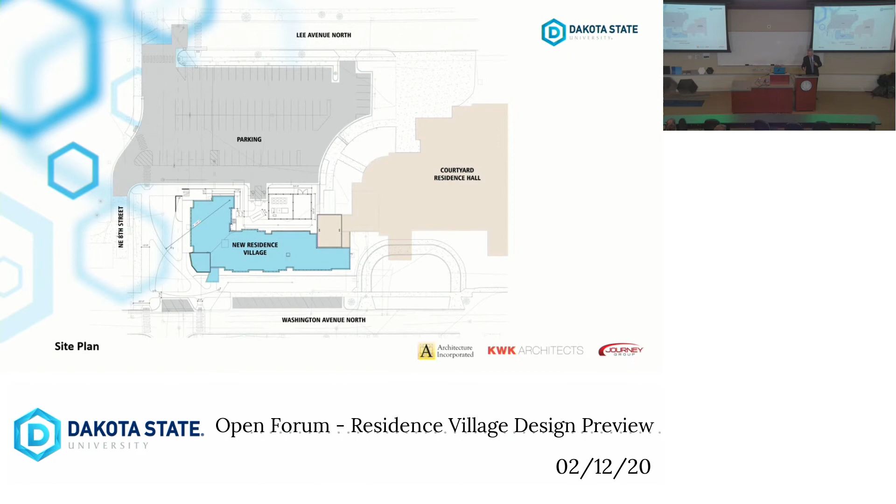So, okay, these are some of the exterior renderings. Did I jump one? Yes, one second, sorry. Okay, so this is a rendering from the back of the building. You can see the connection to 8th Street will be here.

So we're really trying to make safety extremely important. We made a clear effort to differentiate between traffic for the parking, traffic for the service of the student union, and pedestrian traffic for the students, making sure these are two separate things that don't cross each other. As you can see, all the parking for the courtyard is largely respected there. You have the four-story buildings, a combination of brick and precast concrete—we'll talk about that later—trying to link with the elements and colors that are part of the campus.

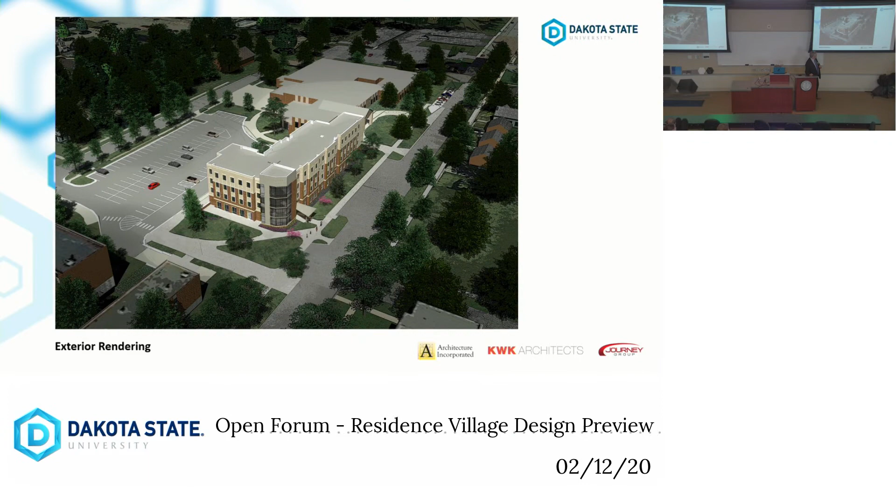So there's one more. This is a bird's-eye view, and that's the main entrance right here. You'll see we really are expressing those spaces that are part of the community building for students, and then we have the residential units that are a little more residential in scale, even though they are fairly large once you are into the bedroom itself.

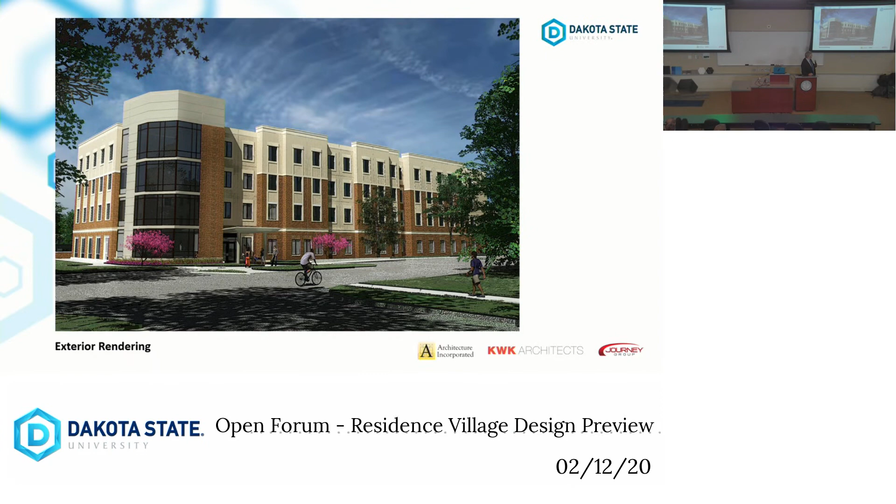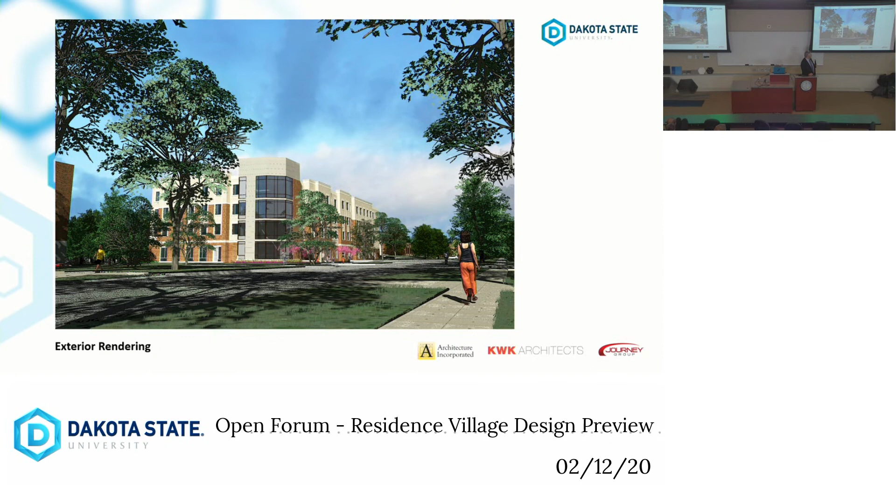Again, another just a little farther south. They're talking about the floor plan and the strategy used for that. I'm going to leave Terry to take it, hopefully she'll be much more versatile with this.

So this is the first floor plan. It looks a little different than the floors above, obviously, because this is where you come into the facility. North is this way. This is the main entrance, which is what Javi had pointed out, adjacent to all the glass, and that's why you see the lounge here, because that is where all of the common and community spaces are.

He briefly mentioned the kitchen is here. This is a community kitchen that can be used by all the residents, regardless of which floor you're on, but there's a kitchen on the first and third floor, and a lounge on all floors.

Here you can see some different color coding, and that's indicating different unit types so you can sort of associate which is which without really studying it. We have what's called a retail space, where we're going to have a food and beverage retailer on site. Mechanical is all gray because that's all the boring stuff nobody wants to know about.

But one thing that is gray, Corey's mad at me now, that is important probably to everybody living in this residence is the on-site laundry. You'd have access to the RA office, the RD office, the RA workroom, and the vending machines.

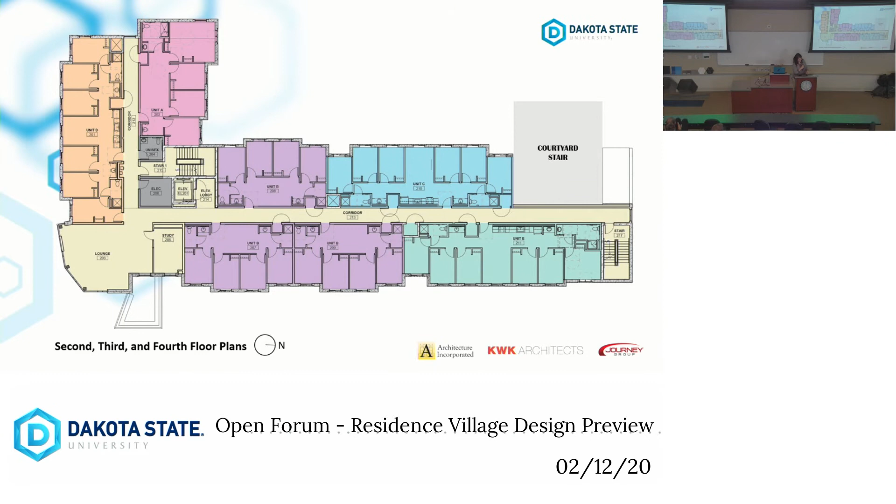So we'll go over some of those differences. This is Unit A, which I would consider to be a fully accessible unit because there's a full roll-in shower. Some other features about this plan are that there are 2 vanities, so if somebody's using the restroom, somebody else can be out getting ready, brushing their teeth, or whatever to get off to class, and you're not all tied to one bathroom, which is really helpful.

This would be 4 bedrooms. Everybody has a closet, and this living space would be a nice area for everybody to communicate and hang out together.

Unit B. This one is interesting to me because, knowing how it is to get ready with a bunch of other people in college, the toilet and shower are separated, so people that shower at night and people that shower in the morning can have separate spaces. There are also the 2 vanities out front, which helps with flexibility of everybody's schedule. This also has a living room, and this would be considered one of the semi-suites.

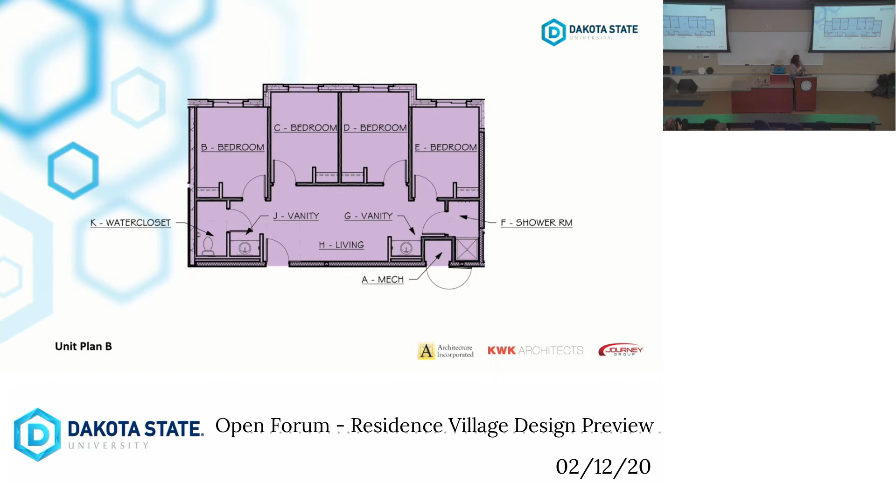This is Unit B, one you've probably seen the most on the different floor plans. Unit C is one of the 6-bedroom units, and like I said, there are some differences in the restroom layout, but this one has a separate living area and separate kitchen area. It is the 6 bedroom, so this would be considered one of the apartments.

One thing I'd like to point out that I haven't mentioned on any of them, though they've all been labeled, is that each has its own mechanical room, which may matter if you'd like flexibility in the temperature in your unit. One thing that's unique about this residence hall, that I haven't seen in others we've done, is that there will be flexibility for each apartment or semi-suite to control temperature for comfort. Some people like it 60, some like it 80. There will be flexibility in controlling that temperature within your own unit, because the type of system we're specifying allows you to use the cold from one side of the facility to cool off the other, lending itself to a lot more flexibility for the end user.

Unit D, the one thing I want to point out is that the RA unit is here, with an exterior door that accesses right from the hallway. That's nice because if somebody needs to talk to the RA, they don't have to wake up the 5 other people who live here. Or if the RA wants to have their door open for a bit, they can do that without interrupting the rest of the group they're rooming with. This still has the outside vanities, the 2 restrooms, and also incorporates a nice kitchen area.

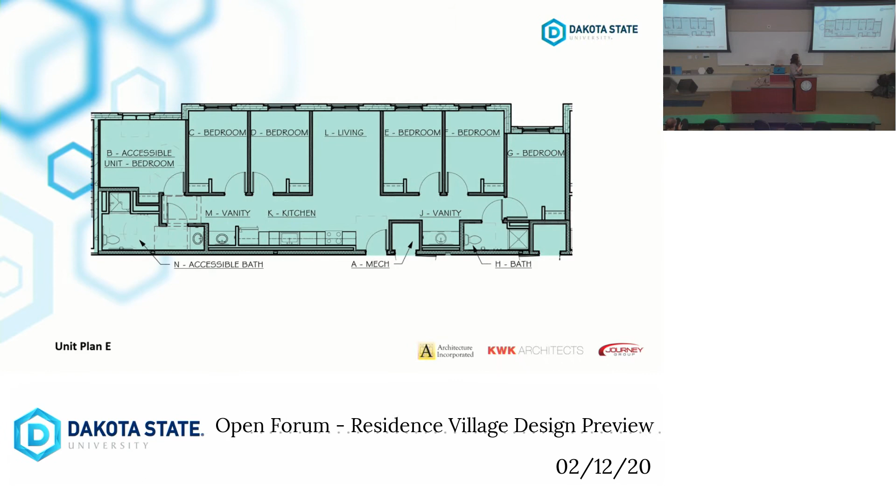Since Dallas isn't here—oh, she is here. This is Dallas. It's bad visibility out there right now, guys, so just be prepared.

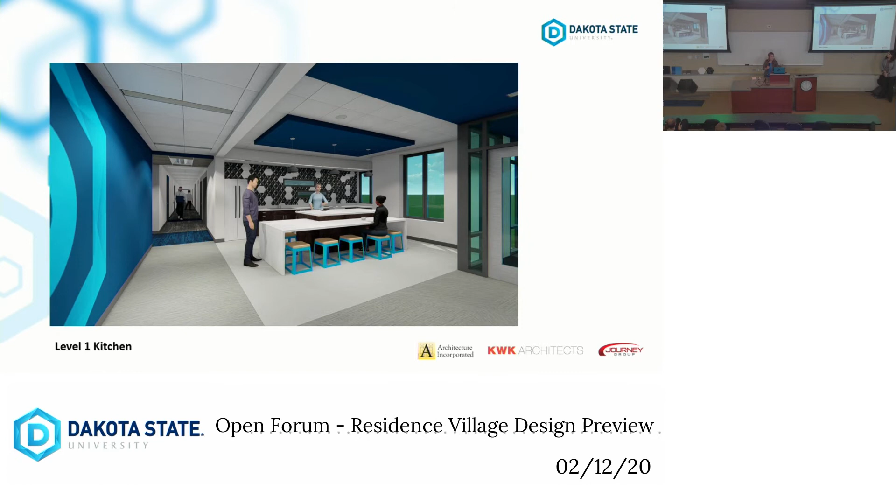Do I have to push this? Oh, it's sensitive. Oops.

To the left-hand side as you walk into the facility is more of the lounge space. We really wanted that to be versatile and functional because a lot of us will be doing different things in that space. There's an area where the TV can be hung so you can watch Game of Thrones or hang out with friends, and areas where you can do homework or just sit and chit-chat. There's a lot of natural daylight, and again we bring in the hexagon shape and the colors and variances of gray in the facility.

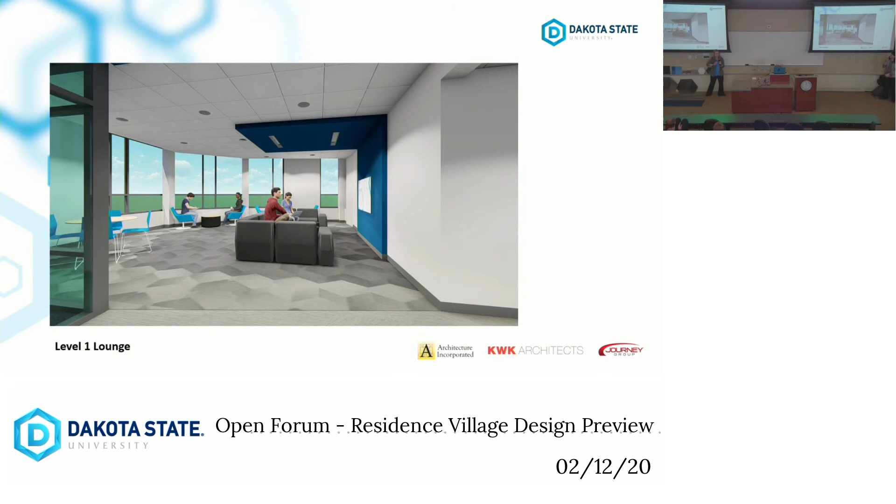In addition to paying attention to DSU's branding and building off KWK's great design, we really have to focus on wayfinding in a space. Wayfinding basically lets any user maneuvering through the space understand where they are and not get disoriented. We did that by doing a couple of things.

Why do we address it by so many things? Well, each of us is so individual that some pick up numbers, some pick up colors, some pick up symbols. So by addressing wayfinding in multiple ways, it helps us communicate to the vast variety of people who use the space itself.

We also addressed it by lowering the ceiling height as you come off the stairwells or elevator, and changed that materiality into more of a gray ACT versus white ACT, to help you understand that this is a moment of vertical circulation.

Horizontally, we address circulation in the context that each unit's doorway will change the carpet color to more of a blue tech pattern. We'll also change the color around that doorway to help signify where you are going down the corridor, because it's a long corridor — kind of like The Shining — so you don't get lost and can start picking up where you're at, if that makes sense.

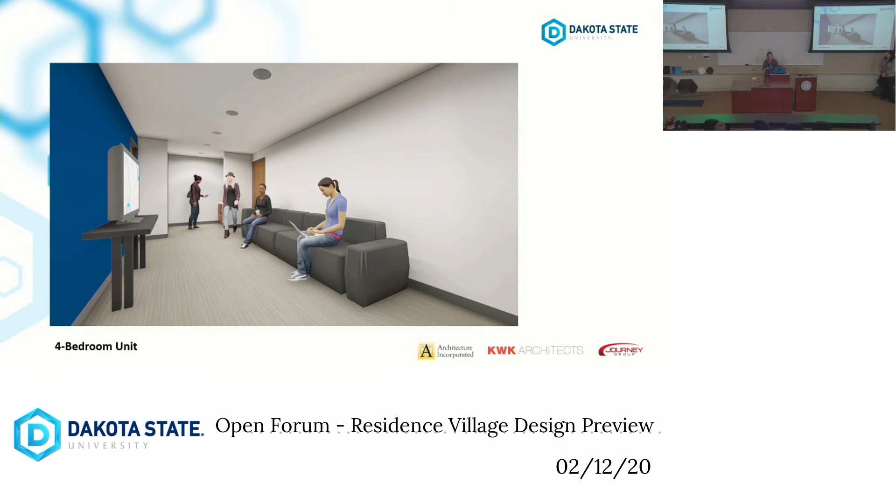We also applied this in the kitchen unit, so instead of doing a backsplash, we used a high performance paint and painted a different color to help give you that upgraded feeling of not just being in an apartment complex, but having some sort of warmth and desire to be there.

And then we warmed it up with the wood, so the LVT is more of a modern interpretation of wood, but the cabinetry is that nice warm wood. And then the vanities will continue that aesthetic and basically give you some adequate storage for your personal possessions, adding a little bit more of that warmth and wood around the mirrors, and really allowing the space to have that modern feel, which I think is DSU's new driving force behind the facilities they build, but also giving that warmth of being at home or in that Midwest, conservative feel.

And then the last place that we add a little bit of color is that living space, to kind of keep you awake and thriving, and then bringing in that natural light to make that space feel larger.

And that's the interiors. Hopefully you guys enjoy it.

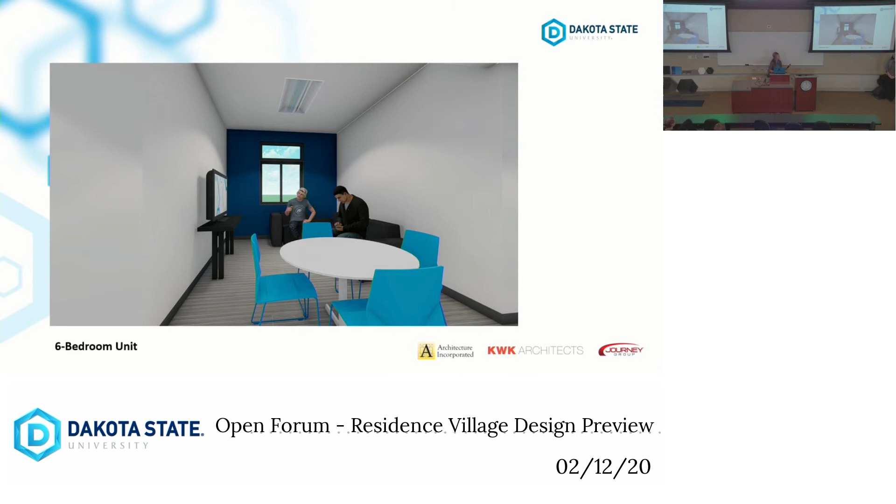First, just to give you an idea on schedule for the project. We're at an exciting point right now, working with the team here, just finishing up the construction documents, ready to go out for bid. Those will be issued out on Monday, and then we will be receiving bids on March 5th. So it's right away here, quick turnaround.

As far as seeing an impact on site, the intent would be the first week of April, we will be setting up a construction site to get a big push hitting into those summer months with the structure itself.

The structure part itself, as Javier alluded to, we have a 4-story precast structure. So we're looking at about 50-foot high precast panels that we'll be putting up this summer. Between the precast and getting the steel structure roof on, we're about a 3-month time frame for that.

So by the end of September, we should have primarily the shape that you're going to see, with the intent of having the roof on and closed around that Thanksgiving time.

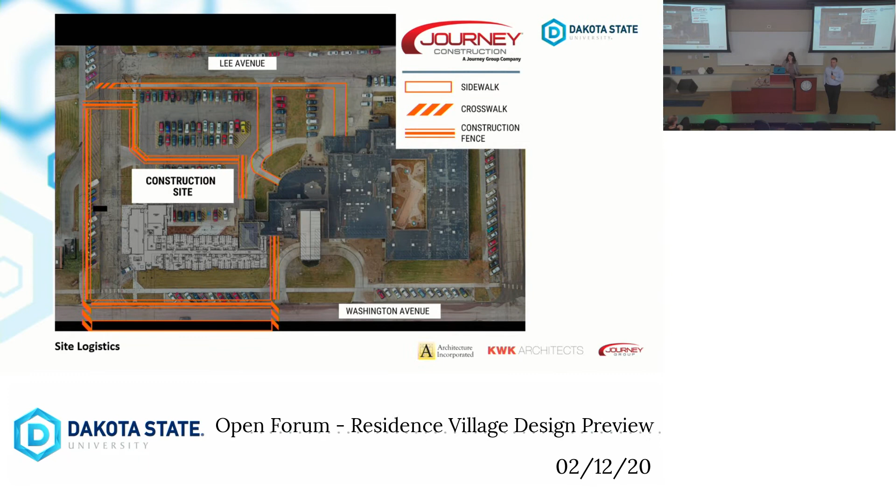Yeah, at the completion of the project, there'll be additional sidewalk here along the delivery lane as well. And then when the green space is done, as the roadway goes away, the sidewalk actually gets widened. It'll be both used as a sidewalk for traffic, but also as a fire lane and for items such as move-in, move-out weekends, traffic ways.

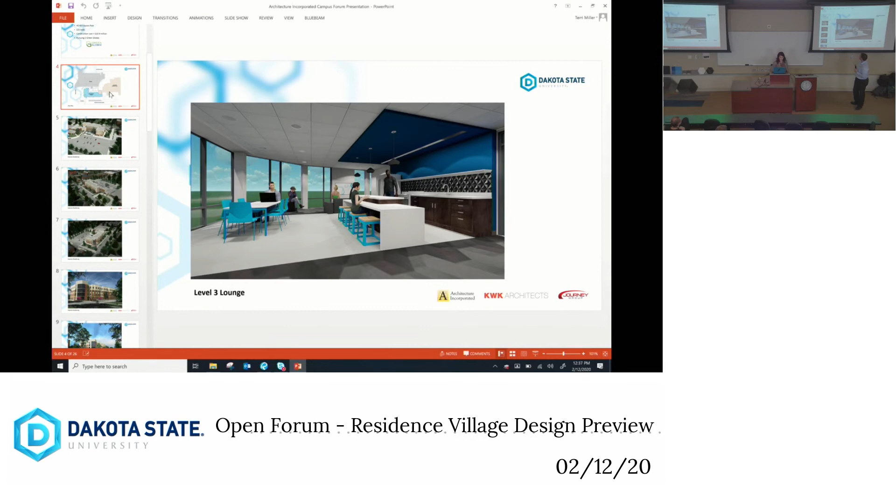I think it shows a little bit more. So part of the priority was to make sure we still really wanted to focus on connecting the campus. Even though we took 8th Street to incorporate it, we turned it into a greenway, a walking pedestrian facility, so that by the time we're done, after construction, there will be quite a bit of sidewalk, a wide thoroughfare. That sidewalk kind of doubles there, gets quite a bit bigger. How to get everybody moving through, otherwise we'll have cattle paths.

Now, we'll get these out and around here, but on that sidewalk along here, we'll maintain it open. There will be a little bit of adjustment as we're doing some construction tie-in at the driveway there for limited times, but for the most part it'll remain open. Our intent is to do that during summer times, and we also know to work continuously with the university, since you have camps and things there too, trying to find that right window to do the work.

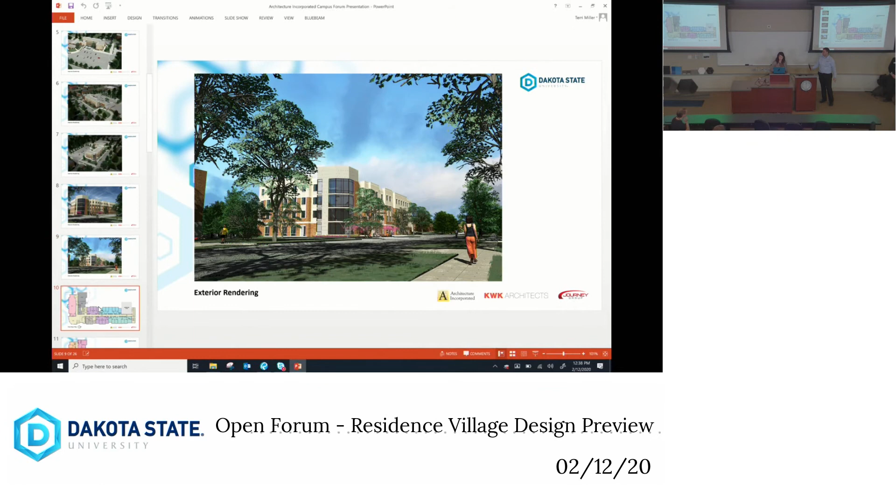There won't be any unsecure access from the retail space into the apartment complex. We don't want anybody to come in the front doors of the retail and go out the back side. Keeping that secure is a high priority for us. This isn't 100% finalized, obviously, but it's something we've been very conscious of.

One of the things we've been doing at the same time as designing this project is looking at our Trojan Center master plan and projecting out needs for the next 5 years. Due to our growth, we have additional opportunities for dining services for our students and employees, and so that retail space will be a food and beverage space.

We need to confirm the company and products we will offer there, but it will also be part of Sodexo. Plans right now are that it will be a site for students and employees for grab-and-go menu items, and students will be able to use their cards to swipe.

Working with Steve Bartle and Steve Johnson with Sodexo, we know we need to adjust our food plans to allow some opportunities for additional flex dollars for our students and employees to purchase those.

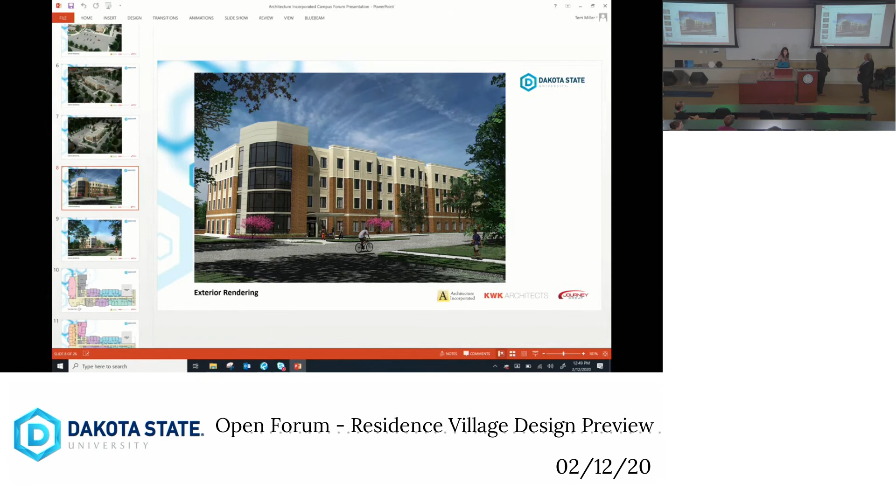We're still working out some details, but on that retail space, we've envisioned perhaps a canopy and a courtyard with seating for customers. We haven't gotten quite that far. Those are things that would get added, but dressing that south side of the retail space up. We're also planning on having some dedicated parking spots for customers who want to pull up and use that space. And then the main entrance, again, will be on the south side of that retail space for the entire campus.

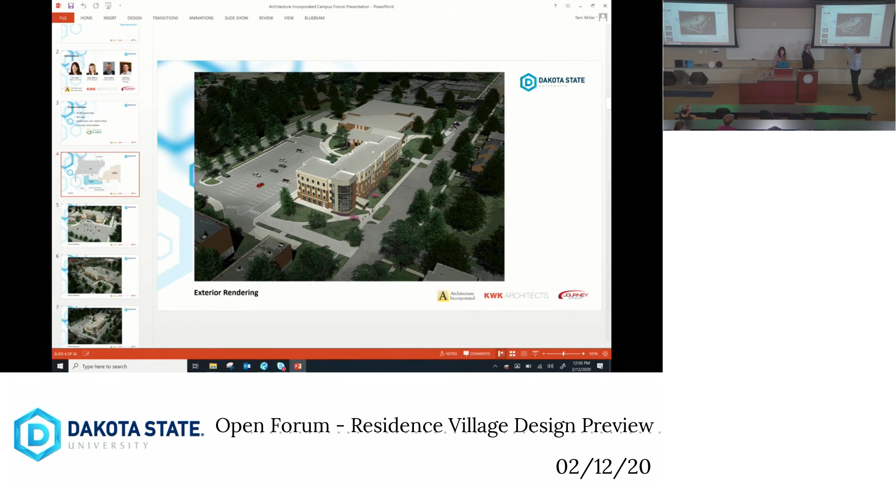I can somewhat address it on here too. Of course, we do traffic studies and study the size of the semis that go there for deliveries. You're right that this path is eliminated. However, there are other route paths that we talked about. With Egan being a main thoroughfare, the thought process is that they would come on Egan, come down on 8th, and then Lee Avenue there, so that is called a hammerhead. So they would turn there and then back in here with a clean access route, keeping the parking further to the north so that there's no issues with routing.

Additional questions? Yeah, I have one more question. As a DSU staff member, I think this is really exciting. And I also think as a community member, I live right off the...

Corey hasn't spoken yet, so we're going to give him a chance. Okay.

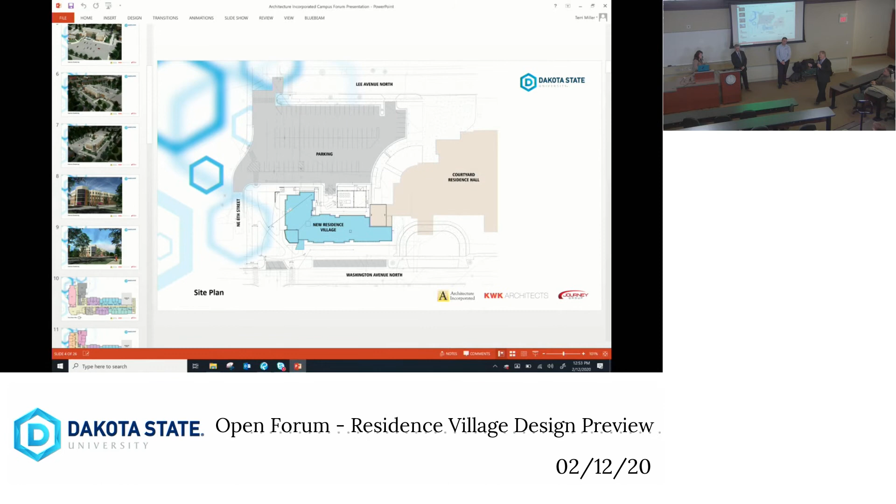Thing I'd like to point out, I think it's a given, but with the 4 and 6 bedroom units, all students are going to have their own bedroom, which is going to be a nice perk for our students. The other thing is right now the plans are for our upperclassmen to be housed here. Right now we're thinking juniors and seniors, but we need to continue to work with Steve's team and fine tune some of those criteria. The good news is we have about 1.5 years to get that figured out. But just so you know, you are now the experts on Residence Village. Help share the message, but that's our intent for the plan.

We'll give time for one more question if someone has a burning question.

President Griffiths. Looking at some of your renderings, can we make sure that all the hexagons point upwards? Our hexagons are special ones, they only go up.

Appreciate it. And for the record, President Griffiths shared that with me after cabinet. I did send Terry an email asking that we get that done.

Again, thank you for coming. We appreciate your time. This is a really exciting project for campus. As President Griffiths likes to say, DSU is rising. This is going to only add to our momentum. And if you have time, our team will stick around. Corey and I and Steve will stick around, but please come down and take a look at the materials. Thank you.